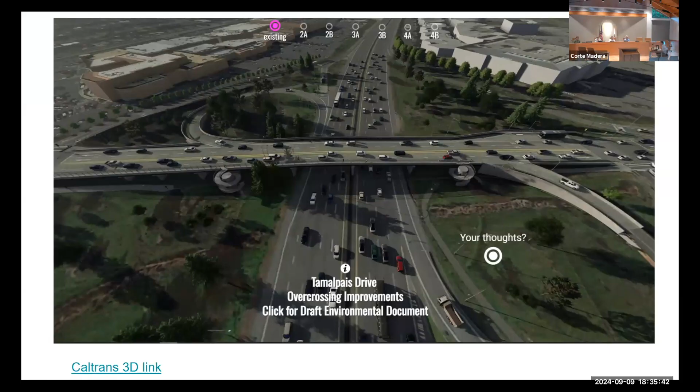Next slide. So Chris, I'm going to share my screen if you can make me co-host, that way we can navigate the actual 3D version. Let's try that. Okay, can everyone see this?

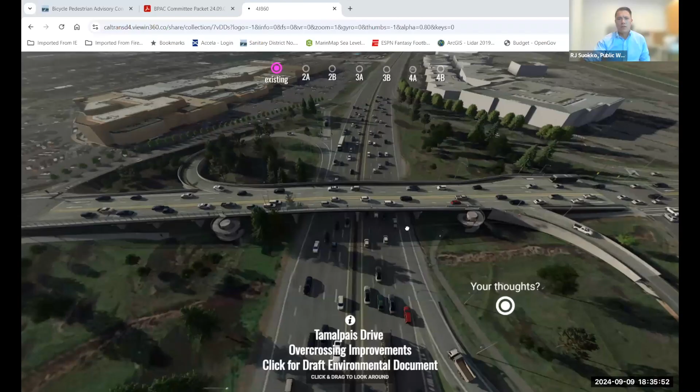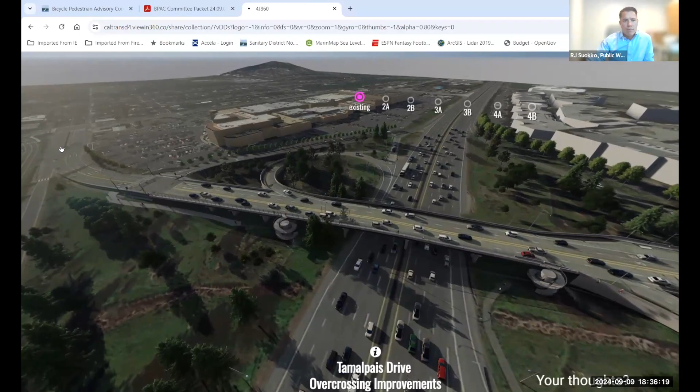Yes. So just to orient everyone, this was the original 3D rendering done back in the CEQA mitigated negative declaration stage. This is a quick view of our existing overcrossing. Here's town center. This is Tamalpais. As you can note, we've got two clover leaves here, and there's the village, and over here. But currently, bikes and peds have to use traffic, or there's a limited 4-foot wide sidewalk on this side that then connects to this ramp here.

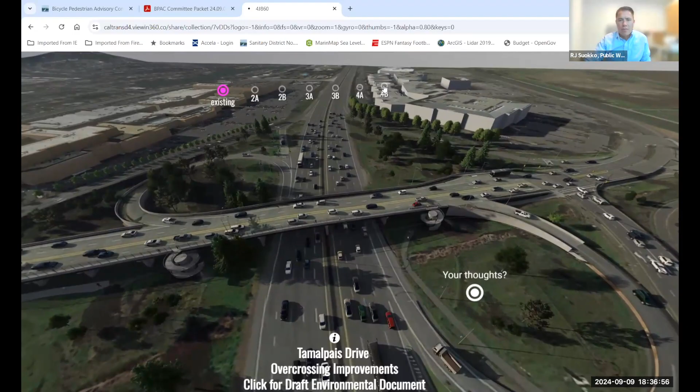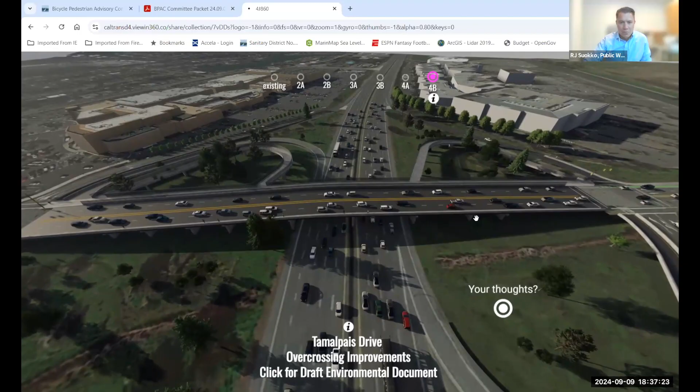So obviously we wanted to take this opportunity to improve this for multimodal reasons, and really to try to connect our communities. Through that engagement effort, BPAC and council all rallied behind this idea, which is Alternative 4B. It primarily consists of a 15-foot wide multi-use path. These bends here are really intended for ADA compliance, because the bridge deck itself exceeds the maximum allowable. At one point they were going to make some modifications here, but they've actually kept this part of the clover leaf as it is now, so that you don't have to come to a complete intersection.

So that's one thing that has been modified since, and I think by our view is acceptable, but obviously looking for feedback there. But really where things kind of came to a head was based on learning more about the traffic operations, and learning more about some of the safety conditions. This crossing here, hopefully you guys can see my hand as I wave it, brought up concerns.

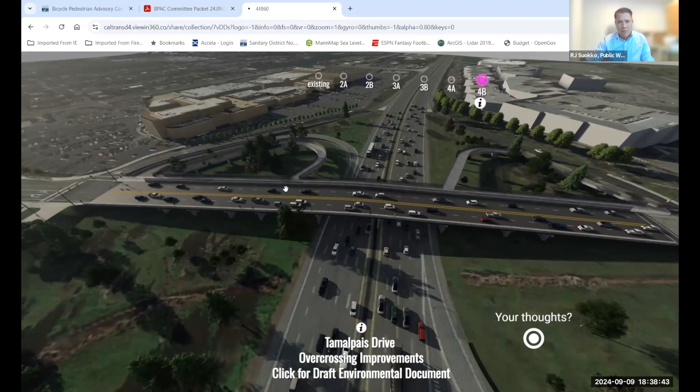It's shown as, if you measure it, about 140 feet, which is very long, much longer than the length of council chambers. So the idea of stopping traffic and making that crossing has the potential to back up traffic considerably. Or, if you allowed permissive right turns, that can cause concerns for peds and bicyclists trying to cross safely.

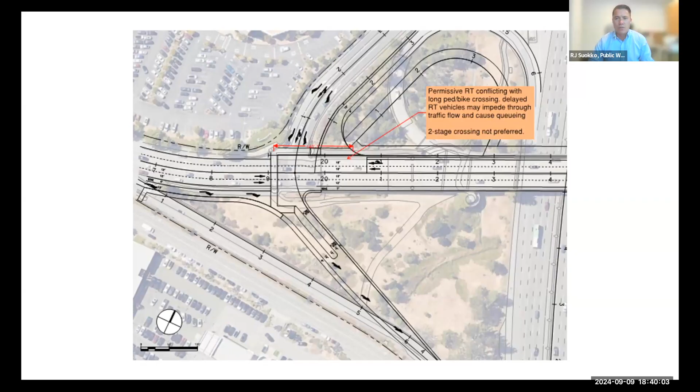So one alternative was to extend the bridge deck and widen it further, as you can see there. That would address the traffic operations needed to have all those things happen at once without backing up.

Our feedback from Caltrans was that's just a non-starter. It's a huge added cost. It would completely reset where they are in the design. They'd be set up to miss a lot of the deadlines they have with some of the additional funds that were found through the SHOPP and IIJA federal funds. So they said no, that one we can't do.

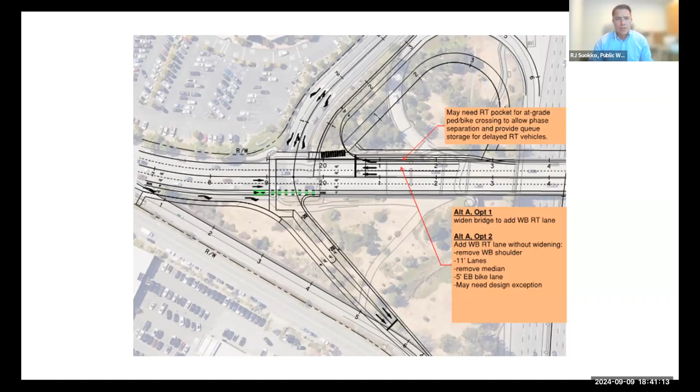Okay, so then moving on to the next option that we started with. Next slide, Chris. This was to consider what we've kind of been calling a loop within a loop. This would allow bikes and peds to make a loop to avoid that cloverleaf traffic that is trying to get onto the freeway to head southbound on 101. So that's a big conflict.

I think our goal was to have a project that really could work for most ages, bike and ped facilities. And I didn't feel particularly comfortable recommending that as our solution for youth and teens and others that we hope would use a facility of this nature. So that's where this loop and loop concept works.

This could be built to, or would be built to, ADA compliance, so maximum 5%. I think bicyclists should be able to make that turn pretty easily. And then we also were going to try to consider some stairs.

And so this is about the time we brought this to several stakeholders, a couple of our council members, and also Craig Hartman, given his years of experience with this type of work. He really had some great ideas. Next slide, please.

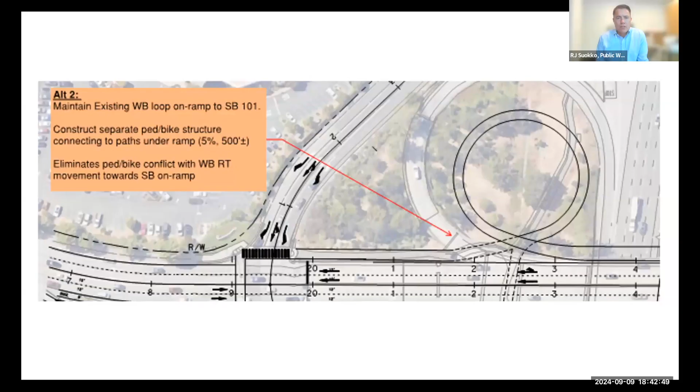Real quick before I hand it over to Craig, this is basically, there is some undercrossing, but this would just be a slightly modified version. We think there's a way to potentially dress it up, but from this view it may look something similar in terms of where the bridge deck is compared to the multi-use path where it comes down. Next slide, please.

And then, Craig, if you're up for it, please take over and share your thoughts. I know you had a nice summary here, and appreciate the work you've done. Take it away, Craig.

RJ, can I just interject here briefly? Is that okay? Sure, yeah. Just wanted to introduce Craig. He actually did the initial design for this project that was submitted to Caltrans. He works for Skidmore Owings and Merrill. He did it pro bono. He's a resident of the town. He did the whole thing free, and it was approved by Caltrans. He came in a few weeks ago and met to look at this, and he is now suggesting these revisions. So we'll say it again later, but Craig, thank you again for your generous donation of time and energy on this. We really appreciate it. But I wanted to make sure everyone understood Craig's background and why he's the guy doing this.

Thank you, Bob. RJ, can you hear me okay? Great. So just briefly, all of this has changed quite a lot from my first involvement in this. My reason initially for proposing some radical changes here was simply having bicycled and tried to walk across this bridge many, many times over 25 or 30 years.

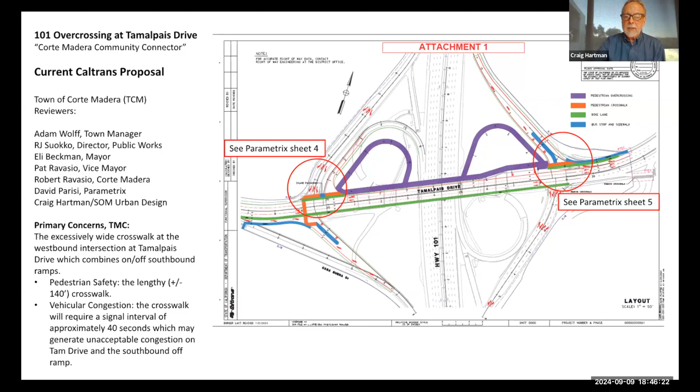David Parisi, as it was pointed out, had identified some critical intersections to the circle there. Without going into all the details, RJ has already described the issues. So anyway, where this has evolved is that there is adequate...

Those who have done the geometry calculations have assured us that one can meet the 4.5% to 5% maximum ADA slope by doing a kind of a loop within a loop, as shown there. The issue, without having a stair, is that then you're forced into doing that lengthy traverse. Everyone has to, and the lack of intuitive connection is a problem.

So this allows those who are ambulatory to take a straight line from town center to village center and back, and then take the more leisurely walk with these ears, if you will, that peel off of this to make the ADA connections work.

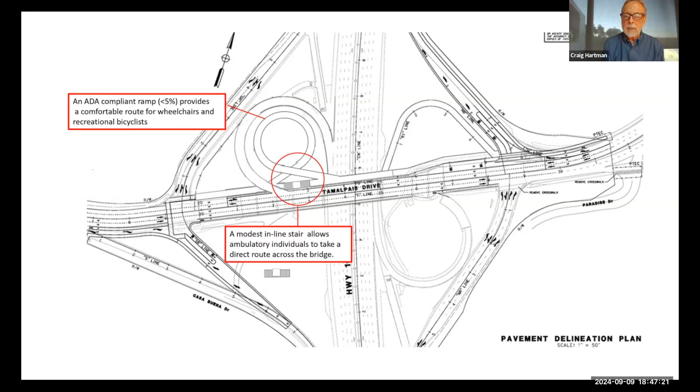Go ahead to the next slide. I think it's important to think about the nature of these ADA pieces, that they can be more than just meeting the pragmatism of meeting the slope. It can actually be a very interesting experiential, architectural, and urban design element.

So I think it's not quite as clear and direct as what we were looking at before, but I certainly understand and appreciate the concerns about the length of that connection that is otherwise coming off of southbound 101 and meeting Tamalpais there on the left.

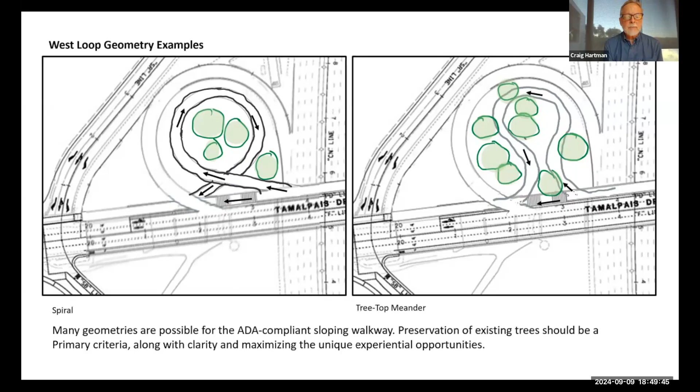Well, here's one, this is just the last one—this kind of diagram idea that shows a simplified version of this. I call it the treetop meander, which is basically meandering through the treetops, through the canopies, and sloping down to meet the grade at an ADA slope.

So that's a summary, and there's obviously a long way to go. And in the end, the critical thing now is making sure that Caltrans is able to follow through with a beautifully designed connection here.

Thanks, Craig. I want to echo Chair Ravasio's comments. Thank you very much for everything you've done on this project. Many of the slides that Craig just presented, he actually put together in less than 12 hours. He's really been a champion and there for the town. Appreciate you for doing all that, Craig.

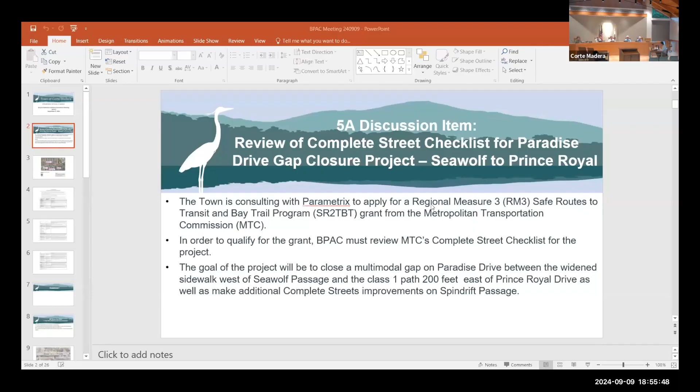There we go. Okay. So

We'll be discussing the Paradise Drive Gap Closure Project, Seawolf to Prince Royal. This is the last gap on Paradise to make a complete multimodal path from basically San Clemente onward, all the way to the town limit with Tiburon, assuming that the project we're working on farther down the road gets built next year.

We've been consulting with Parametrix to apply for regional Measure 3 Safe Routes to Transit and Bay Trail program grant through MTC. One of the requirements to qualify for the grant is that BPAC must review MTC's complete streets checklist for the project.

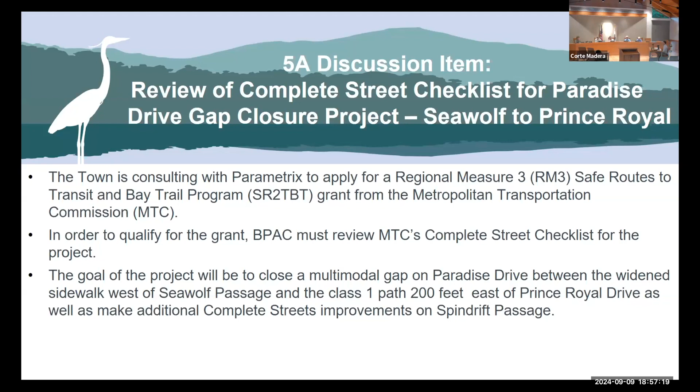The goal of the project is to close a multimodal gap on Paradise Drive between the widened sidewalk we installed west of Seawolf Passage and the Class 1 path that ends roughly 200 feet east of Prince Royal Drive, as well as make additional complete streets improvements on Spindrift Passage.

If I could jump in, Chris, before you switch slides - we did go back and listen to our pretty robust discussion at BPAC. I want to say it was January 2022, that was helping to guide some decisions we were making on the Paradise Drive Complete Streets project between Westward and the eastern part of town.

We did talk about at that time where it made sense to put bikes and peds as we work through this corridor. Nothing's set in stone, but one of the key takeaways that had a lot of strong support was making sure that we don't lose sight of the work on Spindrift. If we do a project on Paradise Drive, we still want to provide a separate facility for school-aged children to feel comfortable if they prefer to be on Spindrift as opposed to Paradise Drive.

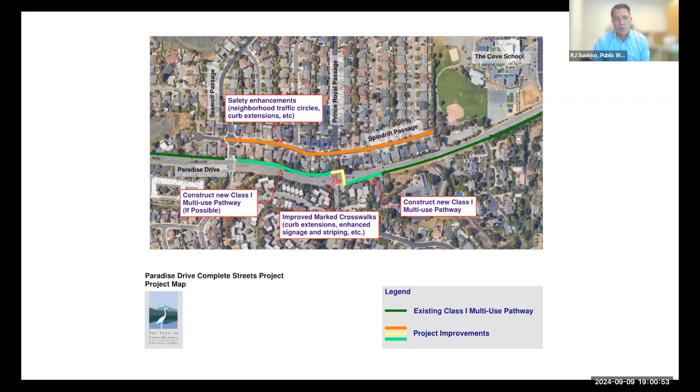The other thing worth noting, Chris and I took a peek at it - the south side is already pretty tight up to the right of way, whereas there seems to be, in most places, 10 plus feet on the north side behind the existing curb. So there is, we think, more opportunities on the north side because of that.

Yeah, there likely would be right-of-way issues on the south side. The only benefit is that there's already a 4-foot sidewalk on the south, so it provides slightly more space if we wanted to widen that. But there's pros and cons to both sides, so we'll have to analyze it more as we dive into the project.

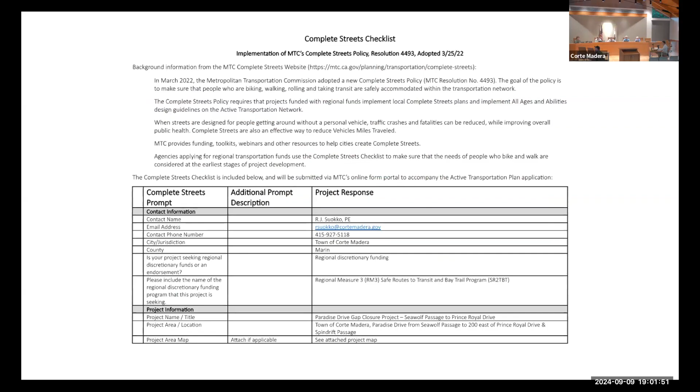So we need to go through the checklist. I don't think I'm going to go into every box because a lot of them are just not super important, but basically this first page is just talking about our information and the project limits, which we've already gone through. So skip to the second page. We already went through the project description.

Item 1 talks about bicycle ped transit planning. As I mentioned, this was listed in the 2016 Corte Madera bicycle and pedestrian master plan, so we can check that box. It's part of the San Francisco Bay Trail alignment, so it's definitely a priority project.

Moving down, the project is contained in the MTC Regional Active Transportation Network, so you can check that box out as well. Number 3, safety and comfort.

This area is not in the town's high collision network, but there have been several recorded crashes in this area, so we think it would definitely score high for this grant application.

Moving down to the third page: transit coordination. There are some Marin Transit bus routes along Paradise Drive, so we would coordinate with them on improvements. I think there may actually be a bus stop in one of the segments we'd improve, so we'd definitely have to work with Marin Transit there.

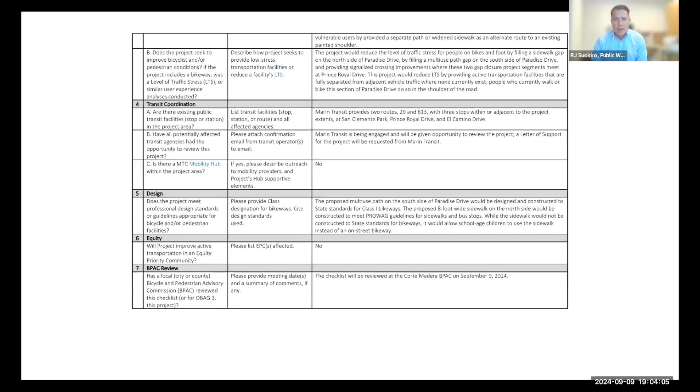To clarify, Chris and I had talked about this and we haven't gone back and updated the slides, but I think it shows an 8-foot wide sidewalk, and we're going to try to get a Class 1 in there. That's definitely the goal, though it's not a guarantee—there are a lot of right-of-way constraints, but that's where we'd like to end up. We'll obviously check in with BPAC as we go through design, as we have challenges. So that third box from the bottom right, we'll be updating to say Class 1 facility.

Something I'm noticing with the new building: I think because the acoustics are so good, if you don't speak directly and people are talking softer, it doesn't pick it up well, at least on the online version.

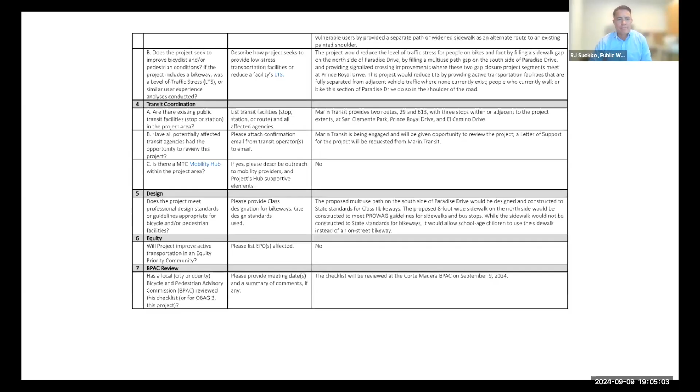Okay, so that pretty much wraps up that item. Is there any questions on that project? First we'll hear if there's any questions from members of BPAC on this.

So, how much money might the two grants provide to the town? RJ, do you know what we're applying for on that one? I don't know, we haven't actually done the application yet, so we haven't gotten to the estimate portion of the application. I don't know, but certainly it's going to be more than $1 million.

Also, to determine how much width is possible, has there been a survey done to determine where the right of way ends? No survey—we're going off Marin Map at this point in time, which is the best information we have. The survey would be funded by the grant if we are successful in the application.

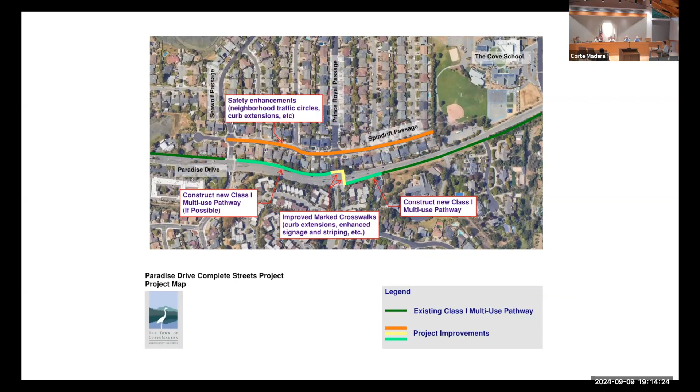And then also on number 3 on the grant application, in your discretion, you might add comments in that section that continues to refer to the high level of children's use to both the Cove School and other schools farther down Paradise.

Yeah, absolutely. We can add that.

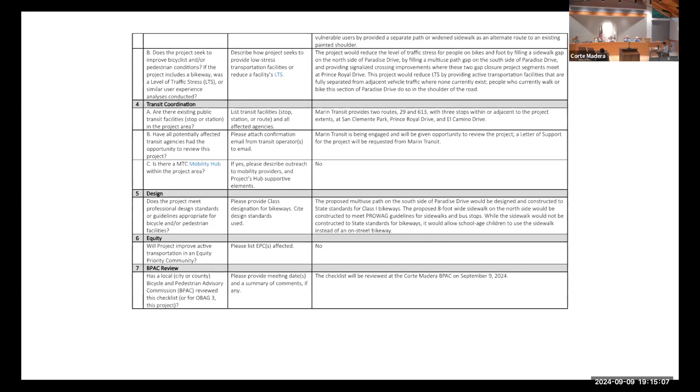So yeah, this probably should have been more of an update because we went into depth on this project last time we met. So we'll keep this one brief, but this is basically a multimodal improvement project on Lucky Drive. I'll just show the exhibit really quickly.

Just as a reminder, we were discussing adding a class 4 cycle track to the north side of Lucky Drive. It would be a connection from the east portion of Lucky, which you can take to the freeway pedestrian overpass, and then run along the north side of the road to a connection to Redwood High School and then to Larkspur farther to the west, which is basically at the town limit.

The goal of the project is to improve bicycle access and safety on Lucky Drive. This update is basically saying that we are going to be applying for a Safe Routes to School grant from TAM to hopefully pay for this project.

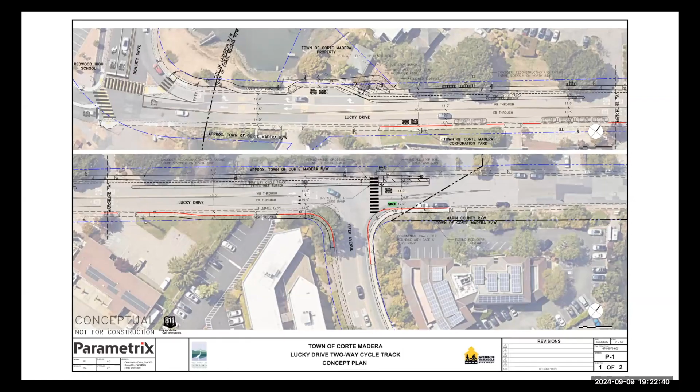It's in the county unincorporated right of way, so that would require some cross-jurisdictional agreement with county DPW. But I think it's a small enough addition that hopefully it could be fit in, and it would really fill the gap between this excellent project, the pedestrian overcrossing, and the whole Central Marin Pathways project on Nellen that's going in right now, tying it all together. It would just be a minor ask, cross-jurisdictional, yes, but hopefully the two jurisdictions could make it happen. Thank you and good luck.

Thank you. Any other members of the public wish to comment? No one else has anything. Okay, if not, we will bring it back to BPAC for any comments from BPAC members. Good luck with the grant. Anyone else? I'll echo that, good luck with the grant. This is a great project. Thank you.

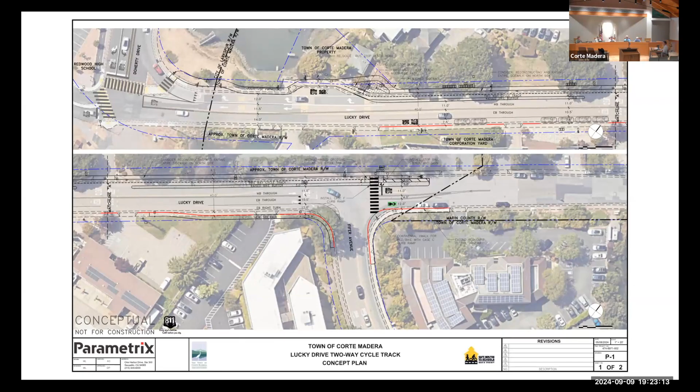And that is it for our meeting tonight. Wow, okay, let's move on to future agenda items. Are there any suggestions or requests from BPAC members for future agenda items?

Dovetailing on Pat Ravazio's comments about Higgins Landing, I'm reminded that the BPAC is also responsible for accessibility issues and making advisory comments to the town council. So if the chair and Public Works staff think it's appropriate, I'd enjoy seeing Higgins Landing placed on a future BPAC agenda so we can look at the long, tortured history since the first dock was destroyed, and what options may exist, since that falls somewhat into our accessibility questions. It'd be nice to see that resurrected. Thank you, let's talk to Adam and see if that falls within our jurisdiction.

I have one request, which I spoke to you about before the meeting, but I'll briefly recap: a recap on where we are on the North-South Greenway project. Tam is planning to finish off the section on Redwood, which I think is a potential disaster for bikers. There's an option to go back behind the shopping center instead. I know there's some complications, but I'd love to get that on a future agenda so we can look at it and figure out if there's a way to do that, because I think that would provide a much better solution.